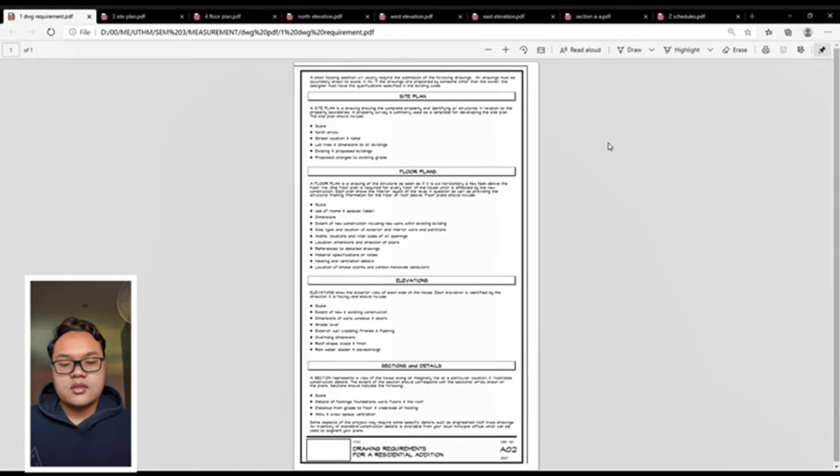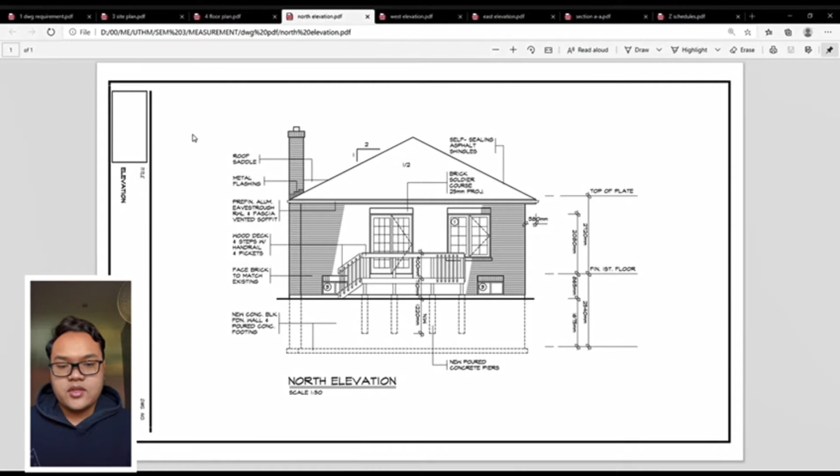The next one is the north elevation. The next one is the west elevation. The next one is the east elevation. And lastly, the section. Thank you.

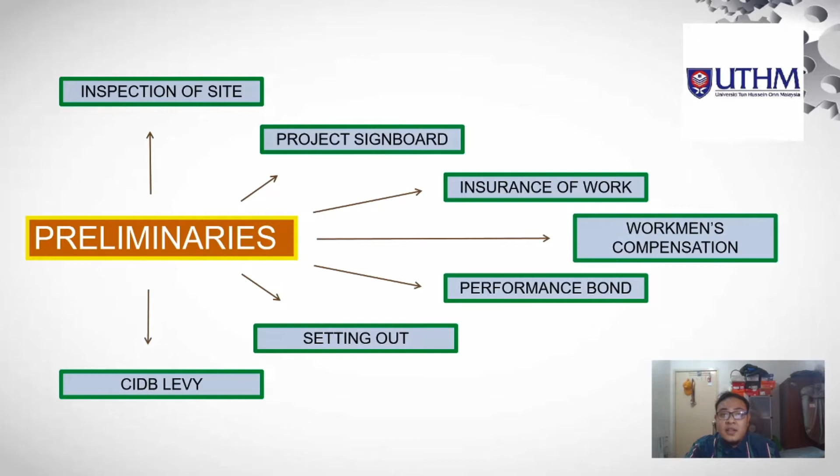So next, for the general requirements, there are also certain items for general requirement that I have put in this assignment, which is the contract documentation, terms of application, tender price, completion of tender application form, commencement of contractual obligations, no price increase, and acceptance of tender.

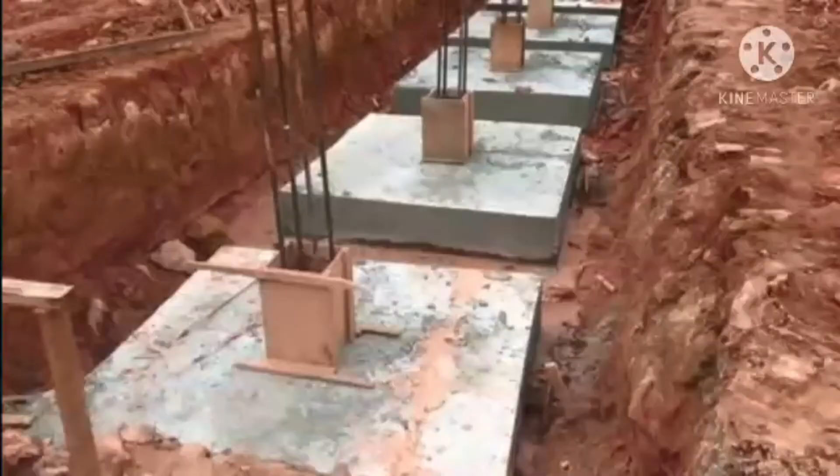Okay, for my part, I'm doing the bill of quantity for work below lowest floor finish (WBLFF), element frame, door, internal finishes ceiling, and internal finishes floor. For work below lowest floor finish, we use excavation pit for pad foundation and excavation rock for pad footing.

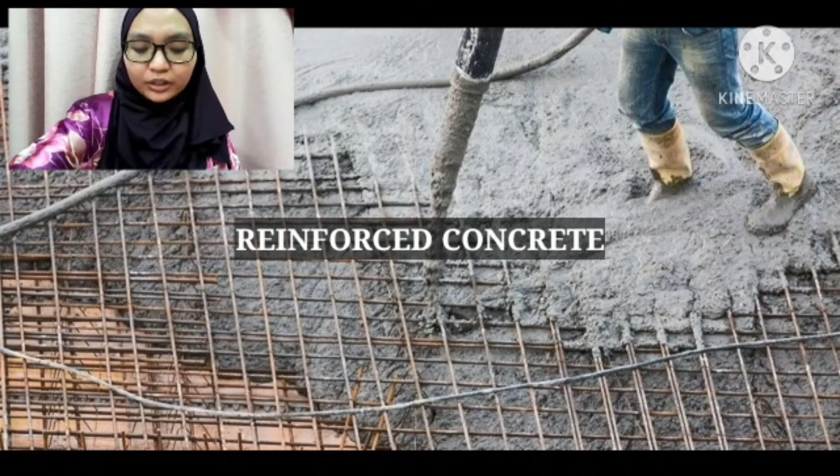Secondly, for element frame, we use reinforced concrete grade 20 in suspended floor slab and suspended ground beam.

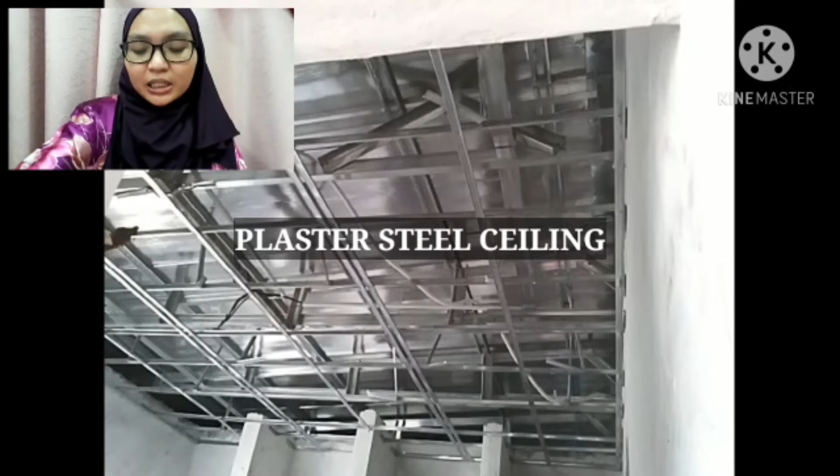And lastly, for internal finishes floor, we use ceramic tile in residential house. Thank you for me.

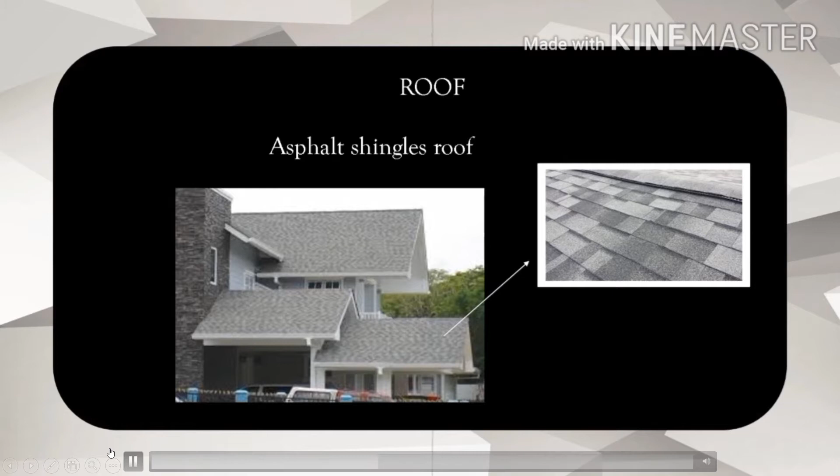Let's take a look at the slide. First, for the roof, we use asphalt shingle roof because this type of roof is easier to install and relatively affordable for residential buildings. Next, external and internal wall.

For external and internal wall, we've used half brick wall in clay and plastered the wall with cement and sand.

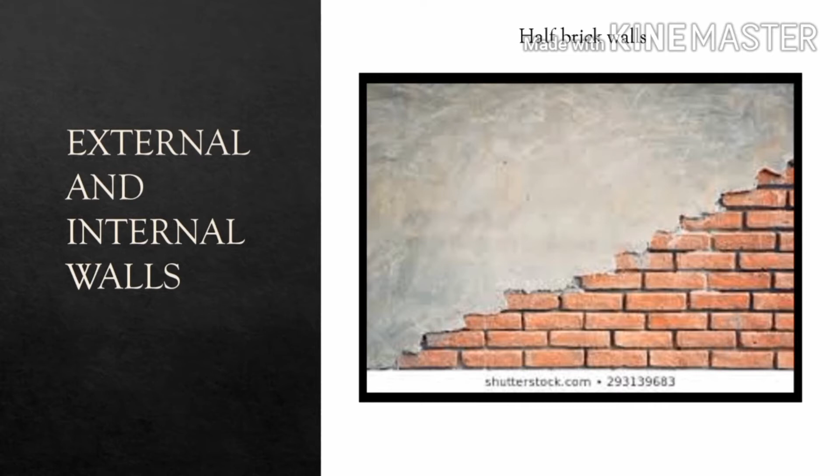However, for painting, 3 coats of emulsion paint to general surface of plastered wall externally and general surface for plastered wall internally.

Next, window. For the window, we use casement window type 1 until 7, and they are singly and in pairs within a common frame, in which case they are hanging on the outside.

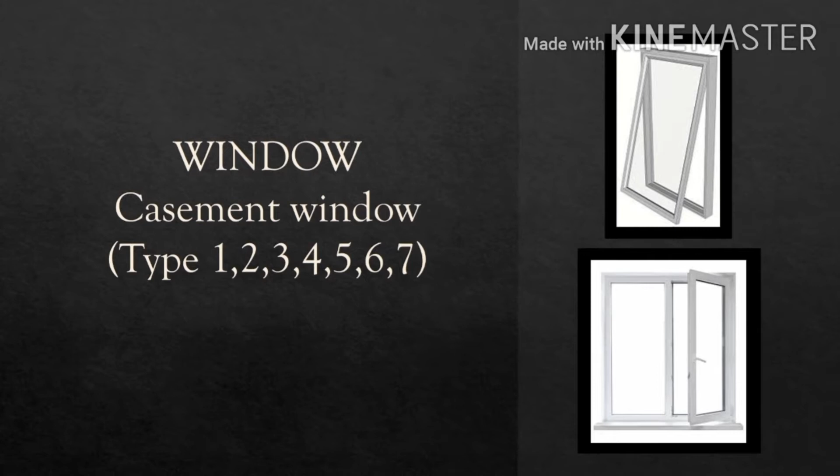For my part, I'll do taking off of WBLFF, door and windows. For WBLFF, the taking off list is site clearance, excavate pit for pad foundation, remove excavated materials, excavate in rock, disposal of surface water, concrete in pad foundation, formwork to sides of pad foundation.

Concrete in pad foundation, formwork to sides of column stump, concrete in column stump, and 20mm diameter high yield steel reinforcement bar, and also 6mm diameter mild steel as link in column stump.

For door, the taking off list is PC concrete in lintels, PC concrete heelstone, timber ground, and purpose made door frame set, head, jamb and stopper, standard door. For the ironmongery, butt hinges, lock sets, barrel bolts, door stop, and prime back of frames.

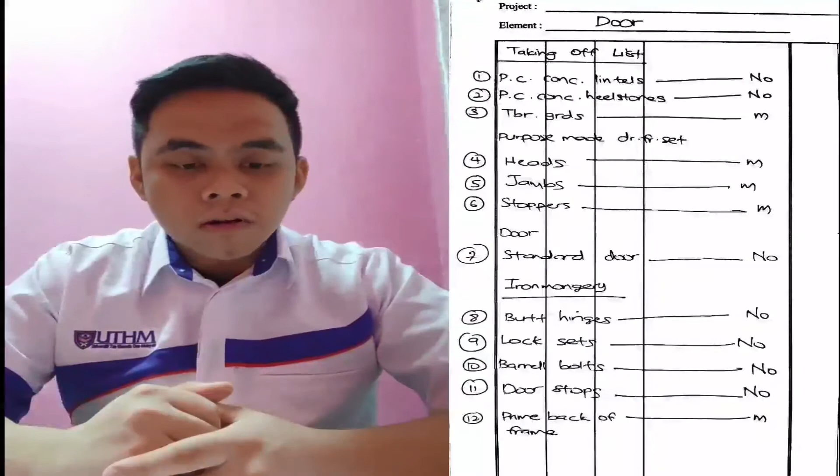Next we go to window. The taking off list is PC concrete lintel, timber ground, purpose made windows and frames. For the ironmongery, butt hinges, casement fastener, casement stays, barrel bolts, glazing beads, glass, primer on site, internal painting to windows and external painting to window. That's all from me.

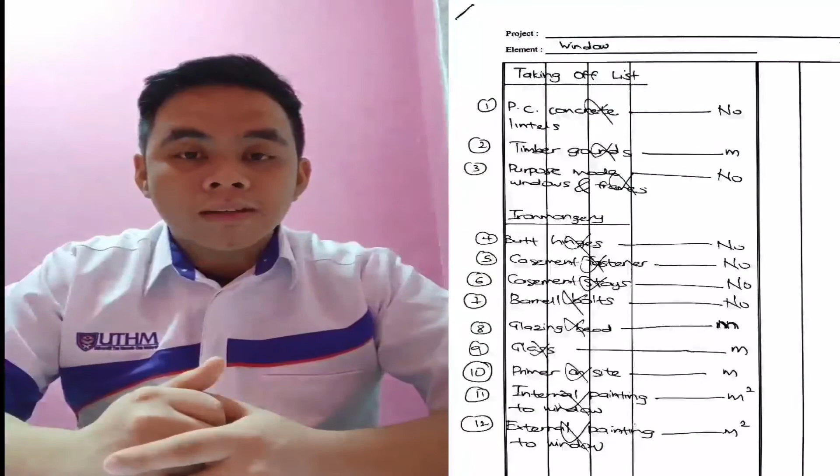Assalamualaikum warahmatullahi wabarakatuh. My name is Masitah binti Bakar and my matric number is CP190106. I am going to list out my part of taking off, which are roof and wall.

The taking off list of roof that I have done are wall plate, rafter, tie beam or ceiling joist, diagonal strut, ridge board, hip rafter, valley rafter, jack rafter, batter, eave board or named as fascia board, and also the barge board.

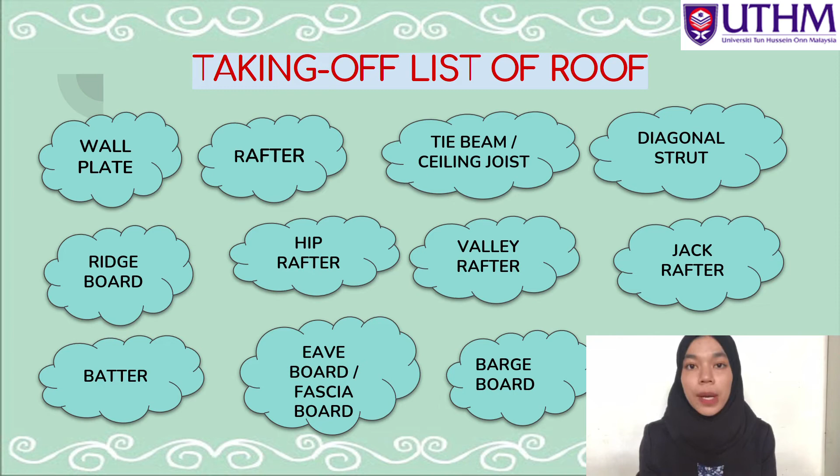The second one of my part is wall, that include internal wall and external wall. The taking off list of wall are first, the wall of half brick in clay brick externally and internally. Next, the wall plastering of cement and sand plastering externally and internally. And last but not least, the painting to wall externally and internally. So that's all from me. Thank you.

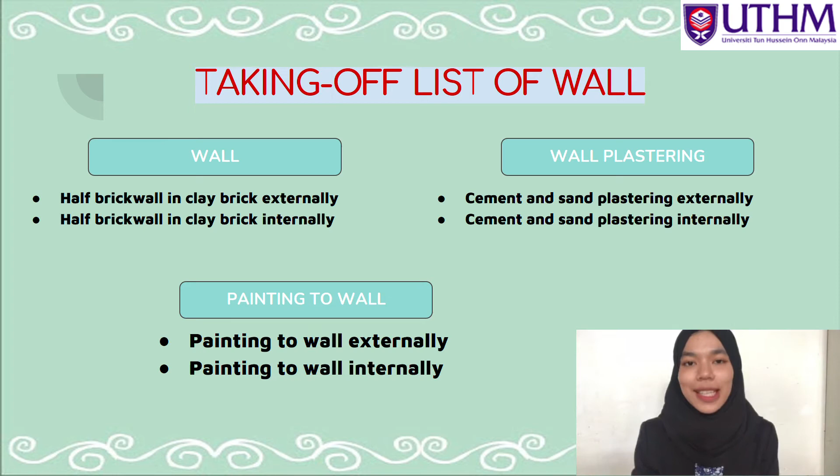My name is Jomling, matric number CP190072. Now I will be talking about the taking off list for floor and internal finishes.

As for floor, there are two, which is concrete suspended floor slab and formwork to soffit of suspended floor slab. And for internal finishes, they are divided into two, which is ceiling and floor.

The taking off list for ceiling is cement plaster to ceiling, painting to plaster ceiling, ceiling panels, painting ceiling panels, beading and painting to beading. And the taking off list for floor is screed to ceramic tiles and also ceramic tiles. That's all from me.

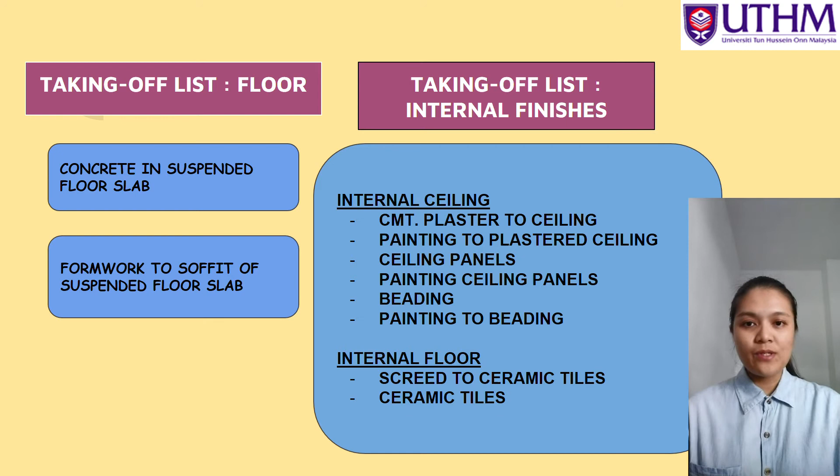Bismillahirrahmanirrahim. My name is Rabiatul binti Awang, CP190033, and I will present my part, which is external work for drainage.

In this taking off list, the element of this work is excavate. Excavate to reduce level, where we use excavate oversite to reduce level starting from ground level at max depth, exceeding to 150 mm. Next, for the hardcore, we filling to making up level average 150 mm thick of hardcore of clean hard broken stone obtained off-site.

Moreover, for fabric reinforcement, we use a layer of steel fabric of BRC A7 lap at joint embedded concrete slab. Meanwhile, for the concrete slab, concrete grade 20 in slab exceeding 100 mm laid on hardcore. Last but not least, for the precast concrete drain, we use 100 mm wide U-shaped precast concrete drain laid to slope as directed by engineer instruction.

Assalamualaikum warahmatullahi wabarakatuh. My name is Mohammad. My matric AP19039. Now I'm here to explain a little bit about my part in our group for construction management.

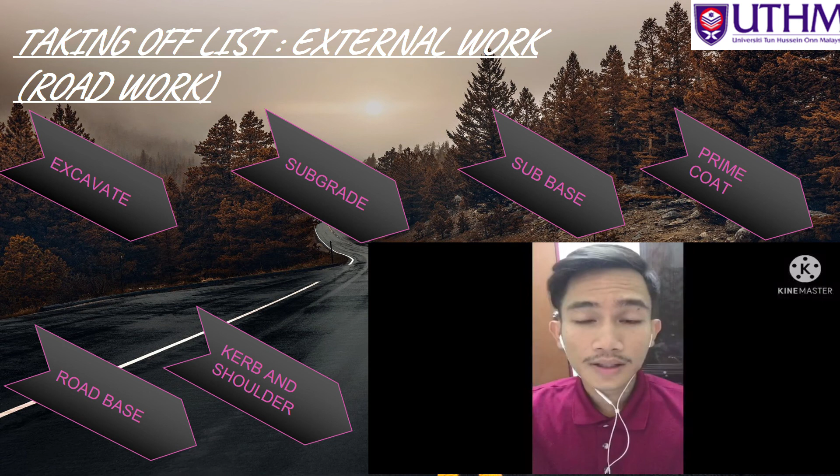My part is external work, which is more to roadworks. This is a few roadworks for roadworks construction. This element includes the excavate, the subgrade, subbase, road base, prime coat, and kerb and shoulder.

For excavate it is 38.10 meter length times 3.05 meter width and 0.25 meter thickness for excavate. It is the same for subgrade, subbase, road base. It is little different for thickness which is 0.23. For prime coat it is also different for thickness which is 0.3 meters.

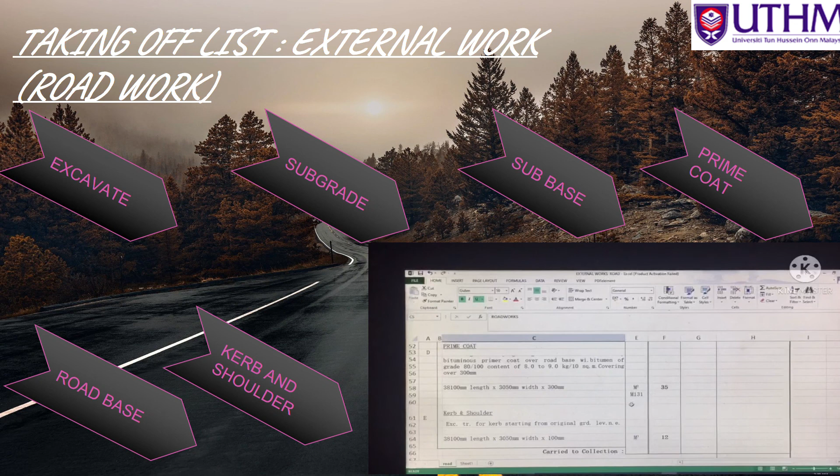For excavate it includes 39 meters persegi. For subgrade 29, subbase also 29, road base 27, prime coat 35, and lastly the kerb and shoulder for 12 meters. This is the taking off paper for roadworks: excavate, subgrade, subbase, road base, prime coat, and also the kerb and shoulder. Okay, that's all. Thank you.